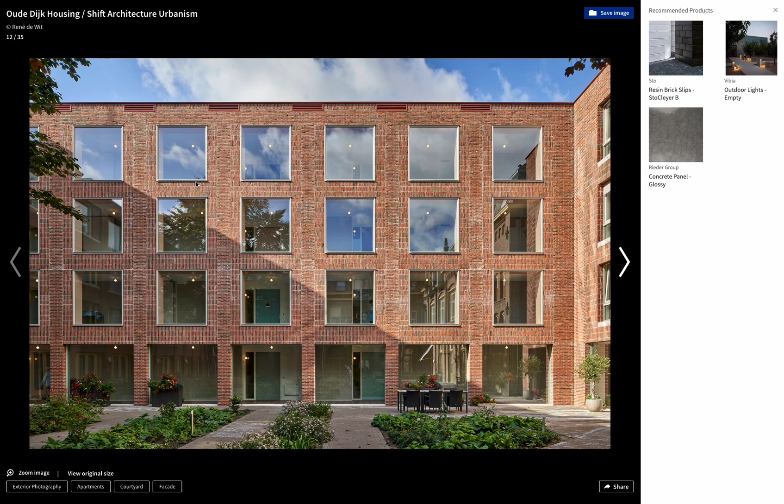Hello, in this video I'm going to use Giraffe to model up this building and use it as a template, so that when you start a new project in Giraffe, this building becomes available as one of the pre-baked templates.

There's a lot of reasons to love this building, in my opinion. It's very simple, very sedate, but with this rich materiality and carefully considered proportion and rhythm, it looks like a really lovely urban citizen. It looks like it's going to be a building that'll last for a long time and add a lot of value. It's called Oude Dijk, I think, Oude Dijk Housing, and it's almost certainly in Holland.

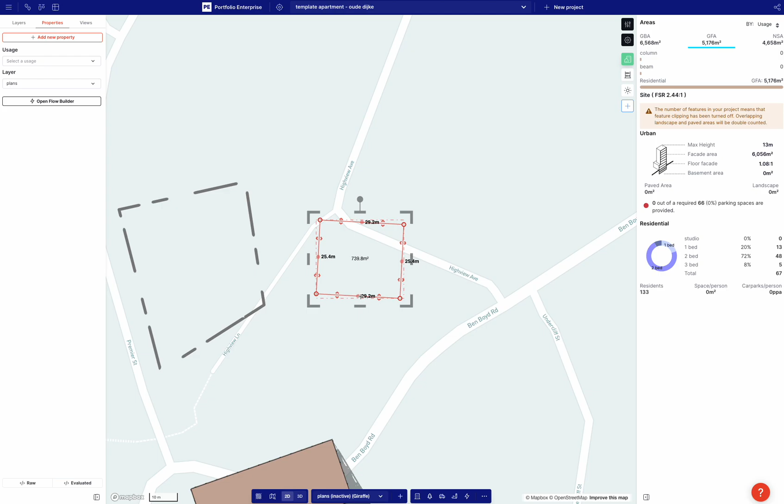I'm going to model this not as an apartment layout, so we're not going to consider the internal layout of this. We're just going to consider the facade, and we'll go through the pluses and minuses of that when we are done.

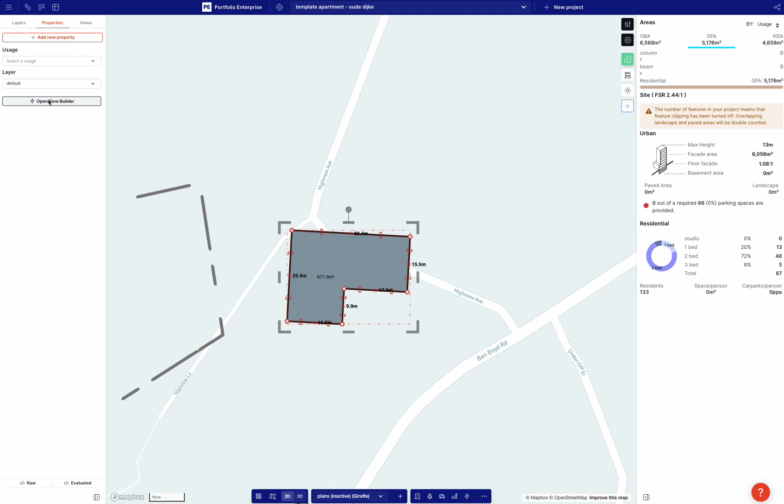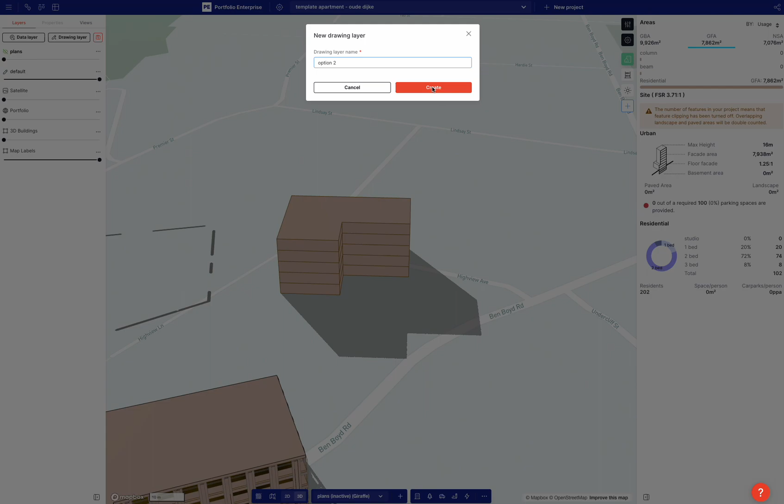So I'm going to assign the usage residential to this building, and I'm just going to make an option to create, just to get rid of this one, which was my practice one. Option 2, buy, and lock. Okay, so it's 4 levels.

You can see this horizontal brickwork goes up, and then there's this kind of vertical infill. So this column here kind of gets a bit skinny. So that distance there and that distance there are different.

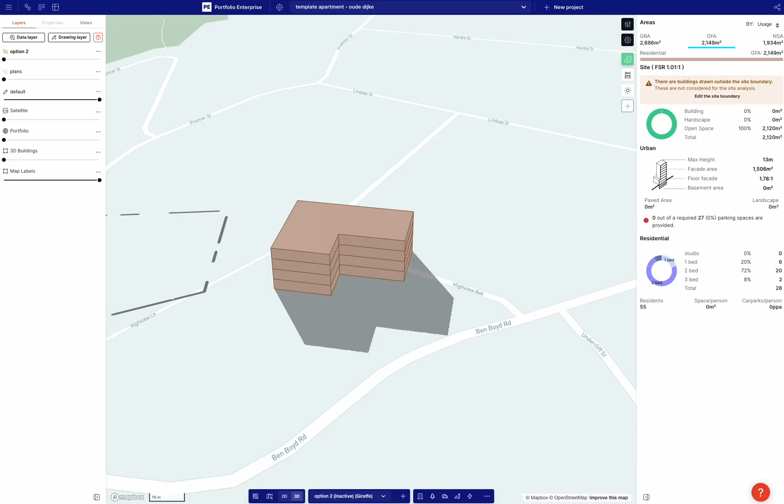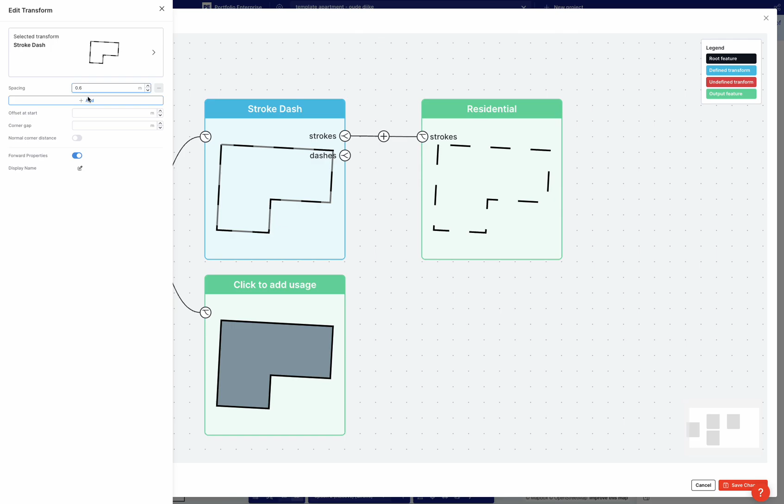Right, so what we're going to do is we're going to use stroke dash. We're going to get straight into the flow builder. So the stroke dash, let's build the initial bay. I think maybe it's about 0.6 by 3.2.

And I'm going to take this and offset this polygon out 0.2, and I'm just going to offset it to the left. And then I'm just going to apply a residential use, just to see what this looks like.

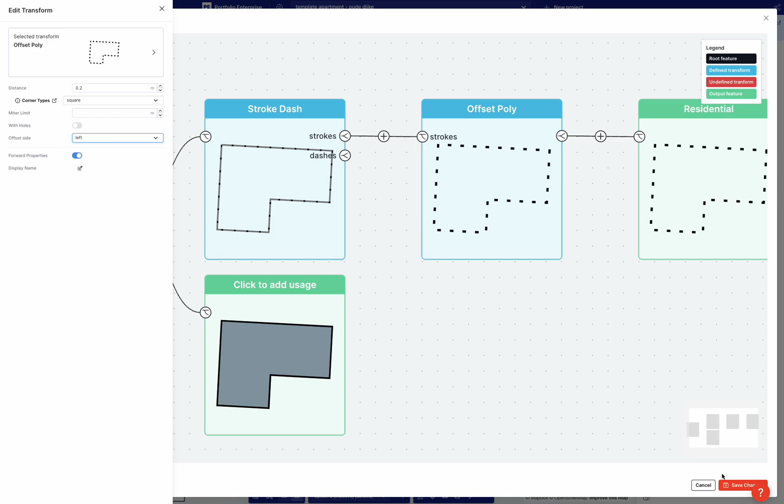Okay, that looks good. You can see that's roughly the right proportion, just a bit more than square. If we come here, you can see that's sort of slightly more than square. We don't want this use to be residential.

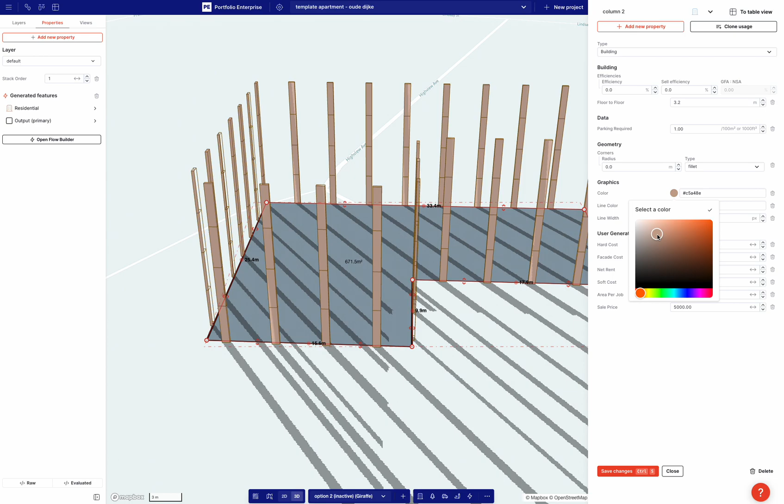So what I'm going to do, I've actually done this already, so let me do it again. I'm going to build a column usage, column 2. The critical thing is that the floor to floor height of my column 2 is the same as my residential floor height, which is 3.2, a very standard residential floor height. I'm going to create a color for this thing, and hit save.

Okay, I can jump back into this flow builder and use column 2. So I'm going to add a usage, column 2. All right, and if I hit save, okay, there we go. That blue outline and that dark brown usage.

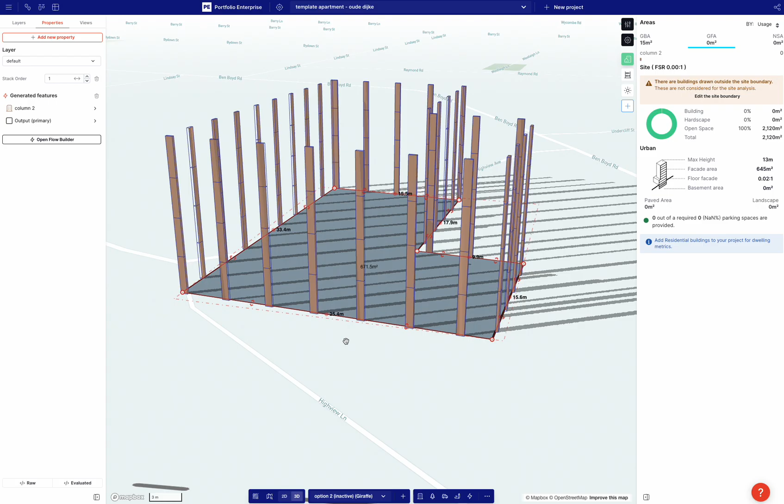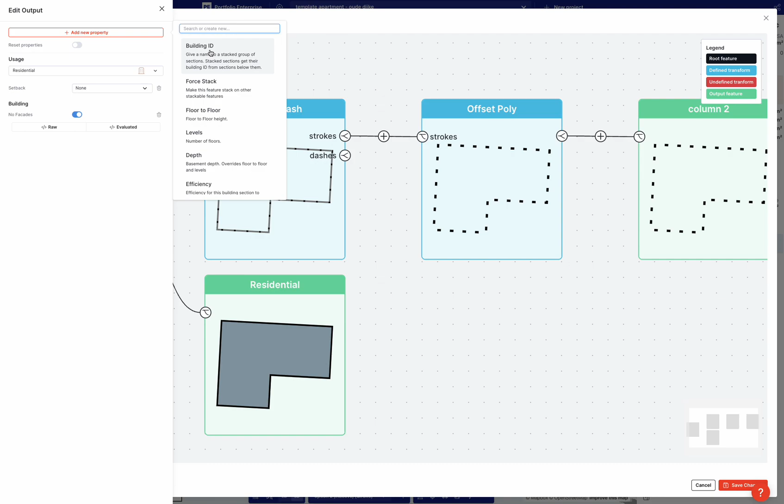Which looks pretty good. What we should do here is turn this into residential, and what I'm going to do is add that no facades property, no facades, and hit save.

And I'm just going to add levels to the main flow. Make sure there's 4 levels. 1, 2, 3, 4.

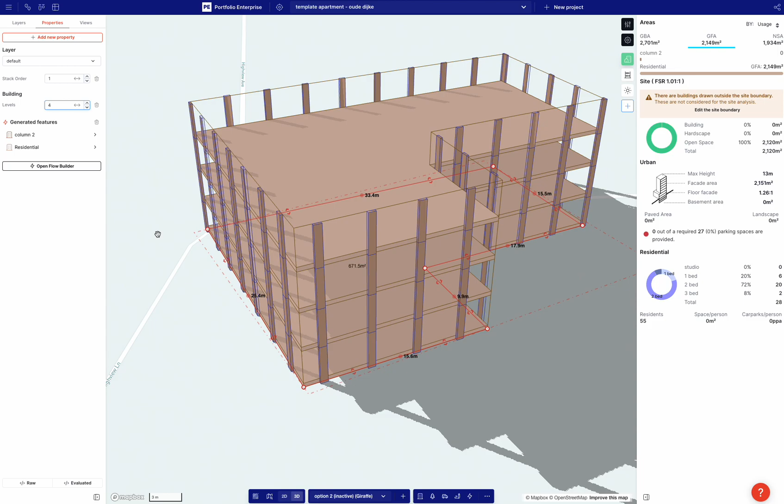Okay, and that column 2, delete those levels. And when I delete the levels on the output, it inherits the levels from the input, and so now everything goes up and down together. You can sort of see we've made pretty good progress.

We may say that 3.2 is slightly too big. We could just sort of start playing with this stroke dash and maybe get it down to 2.9. Now, when I use the up and down arrow, it goes down by a whole unit. When I hold the command or the alt key, it goes down by 0.1.

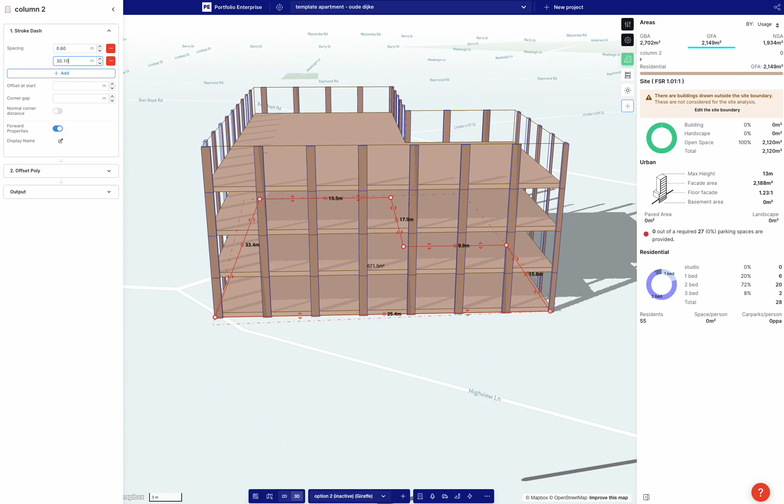If I hold the shift key, it goes down or up by 10. So I wanted about 3.0.

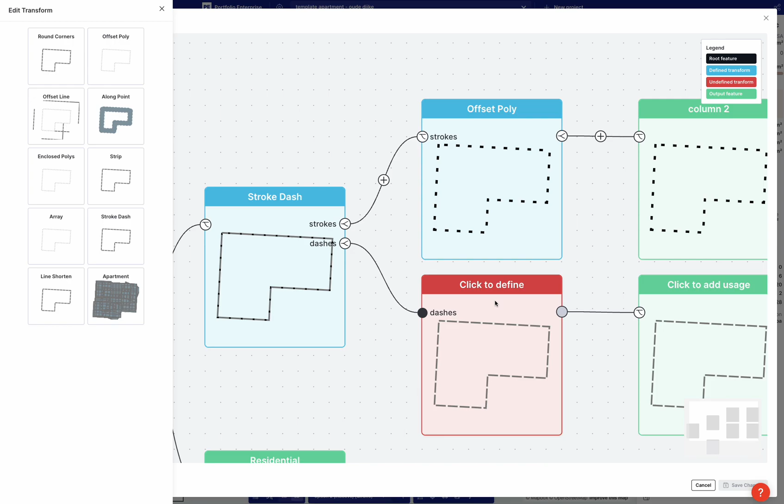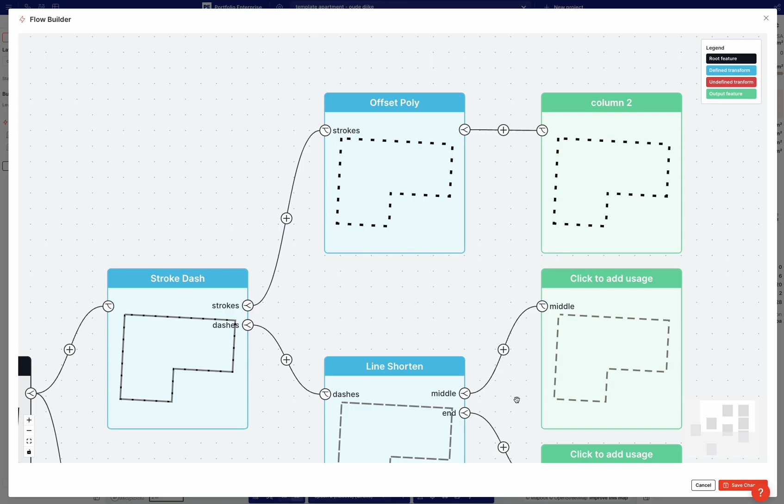Now we need to add some beams across the top, and then add some side column infills. Let's do the side column infills first. We're going to grab the dashes and shorten them, line shorten them by 0.4 at the start and 0.4 at the end. Then I'll grab the 2 end pieces and offset those, 0.2 to the left.

So what we're going to do is delete the levels, and I'm going to get into the flow builder, these ones over here. What I'm going to do is add a base height property, and that base height is going to be 3.2, so it starts 3.2 above the ground, which is one level.

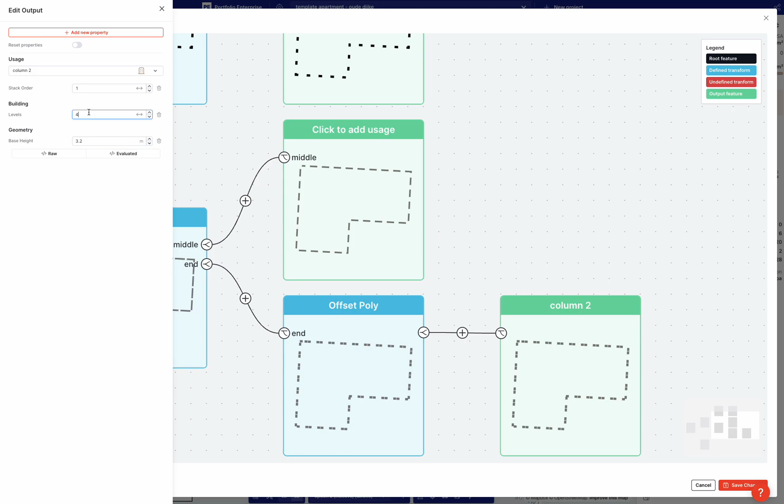And then I'm actually going to add another property, which is my levels. In this instance, I am going to hard code that levels to 3, because the building is 4, and I've started 1 level up, so I only need 3. If I save changes, happy days - you can see now my columns are widening out after level 1 over here.

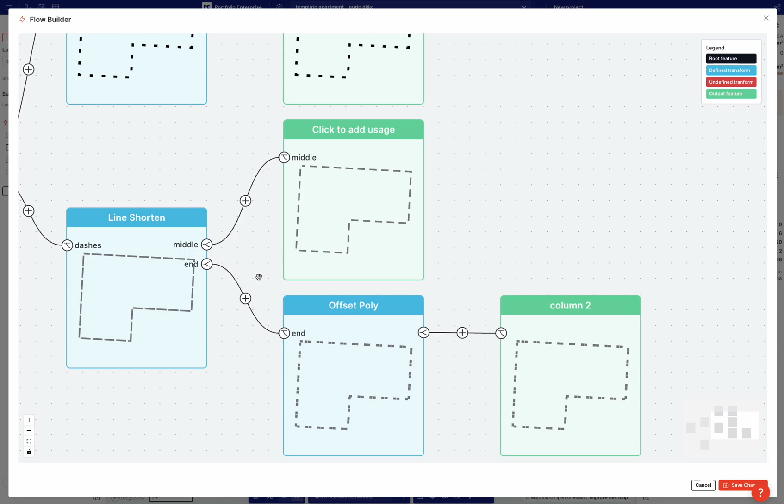All right, so now we just need these beams, and then Bob is your uncle. Luckily we've got the beams over here already, which is these middle sections. So what we can do is offset them as well, offset these polys by 0.2 to the left, which is our standard dude.

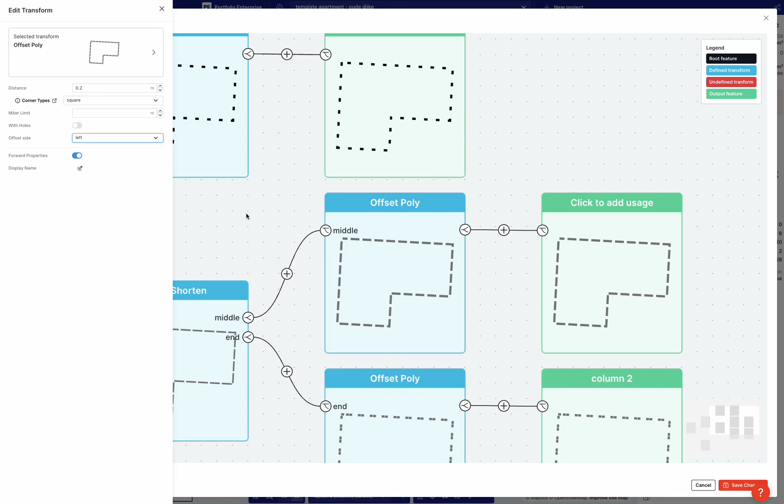And we're going to add this usage. We can add - it actually doesn't matter - well, let me make beam 2 just for completeness. So let me grab column 2, clone it, and call it beam 2. All right, and it's exactly the same.

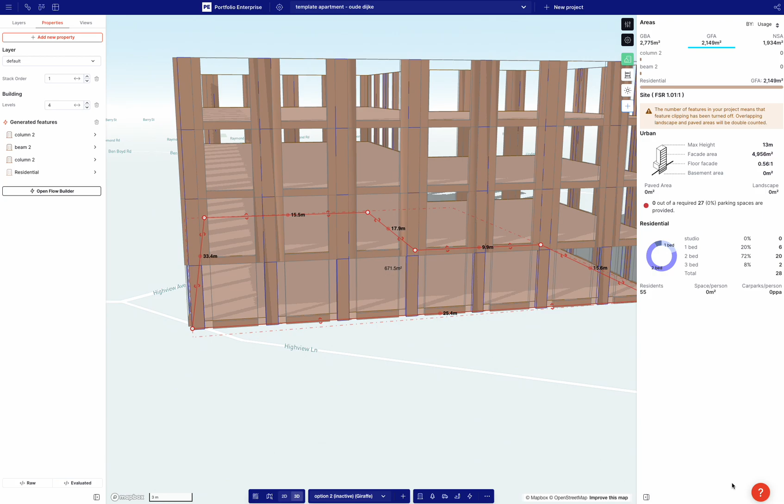The only thing I'm going to do is add a no facades property and set that to true. I'm going to save those changes and hop back into the flow builder, and here I'm going to use beam 2, and just save changes. Okay, and you can see there it is, beam 2.

Now, a current limitation with Giraffe, which we're working on, is the ability to parameterize the depth of these beams. Currently they are defaulted to, I think, 200. That's all you can do.

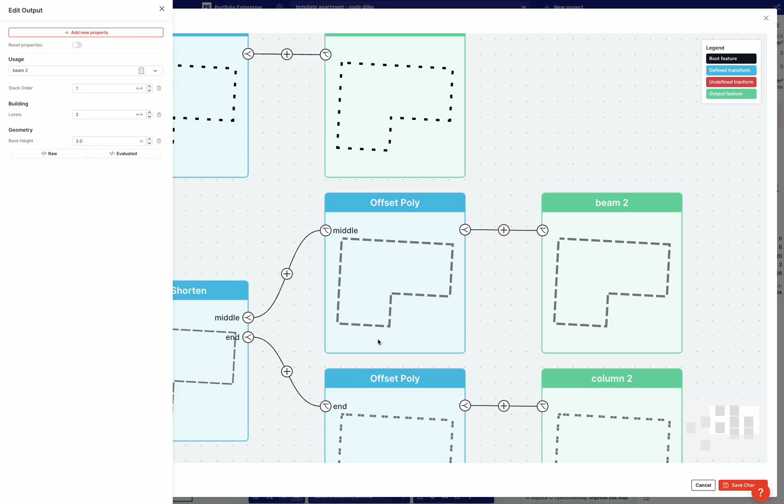So what we're going to do is add a new property called base height, and we're going to do the same trick that we did with that one column. We're going to set the base height to 3, save those changes - right, which is not quite what we want.

What we want is, I'm using the depth of the residential plate, and then I'm going to add the depth of this beam so that they look right, so I get this nice thick chunk here. So it's not going to be accurate, but it's going to be close enough.

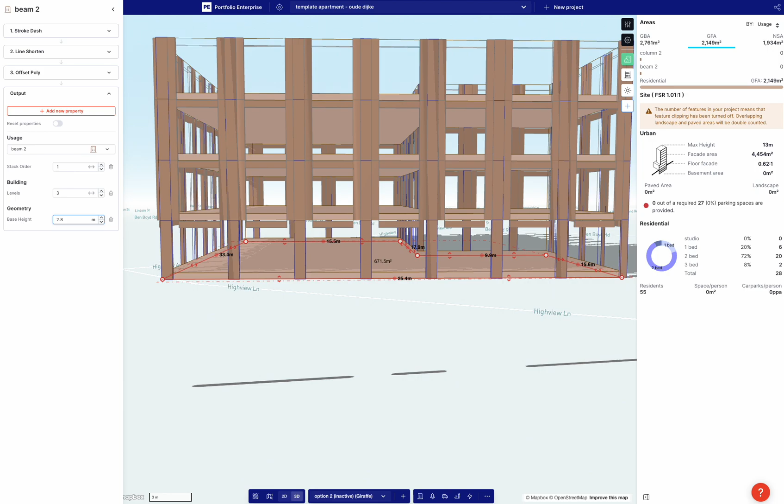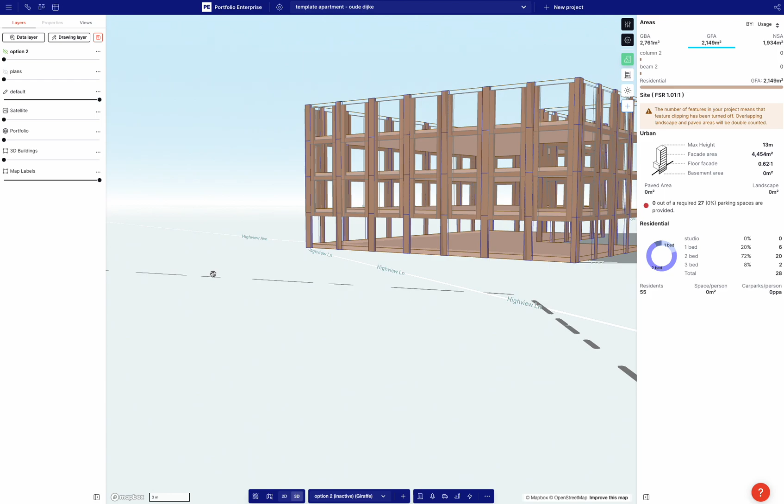All right, so that beam 2, I'm going to lower that to 2.8. And you can see now I want to bring those columns down as well. So I am going to go and grab them, and there they go, down to 2.8. And that actually looks pretty good - I'm pretty pleased with that.

You can see we've got some issues, kind of some battlements at the top, which we need to get rid of. So let's get rid of them.

All right, so what we're going to do now is just chuck a few slabs on the top. So I'm going to set this guy to - I'm just going to leave him as is, I'm just going to add properties. So I'm going to add a base height property, I'm going to add a height property, and I'm going to add a color property.

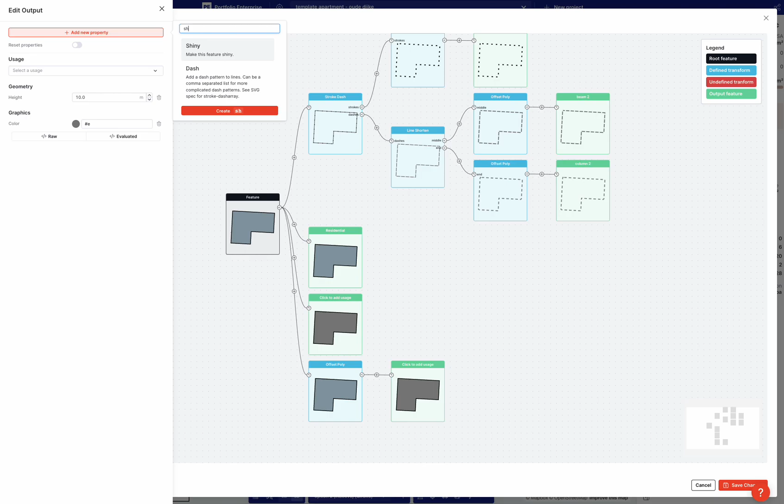I think the base height doesn't actually matter, I'll parameterize this when I'm back in the model. I'm going to offset this poly in minus 0.2, and over here, same thing. I'm going to add a height, a color, and a shiny property, and set that shiny to true. Then I'll hit save, and I should have everything I need.

Okay, and I do, it just doesn't look right. So the first thing I'm going to do is go to my column 2 and grab the color. Just hit Control C and come over here. And that's the wrong one. So I'm going to go to number 1 and change that color to that.

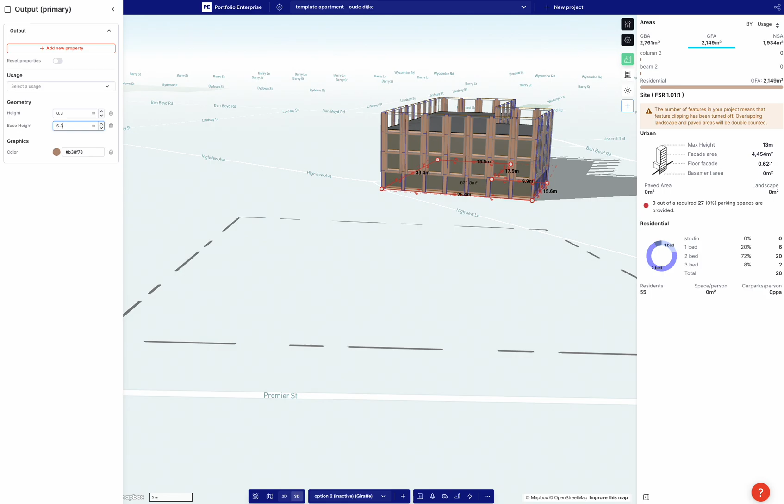Okay, now I'm going to change the height to 0.3, and change the base height to... sorry, I've really gone and messed that up. The height is 0.3 and the base height is too high.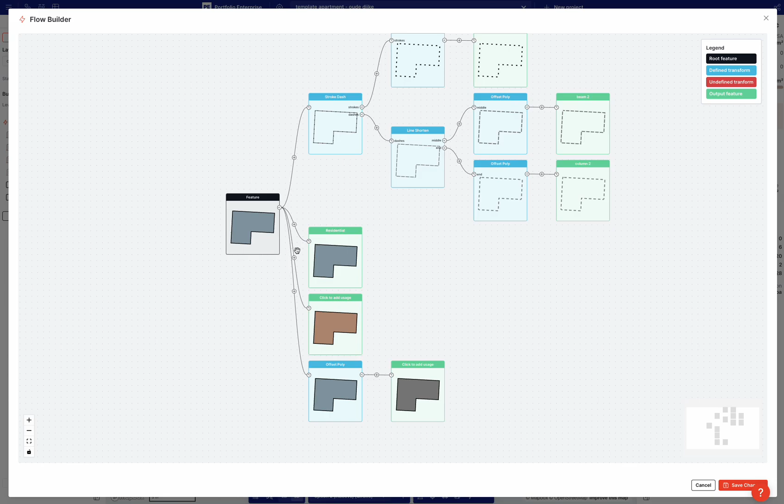I may come back and offset that out. There it is, I'm just going to offset that boy out by 0.2. Save that. Okay, there, so now it's all in line.

It's all in line, so we've got a few issues with the outlines, but at least the lines are good. And now we can get this little guy and set him up to the right height.

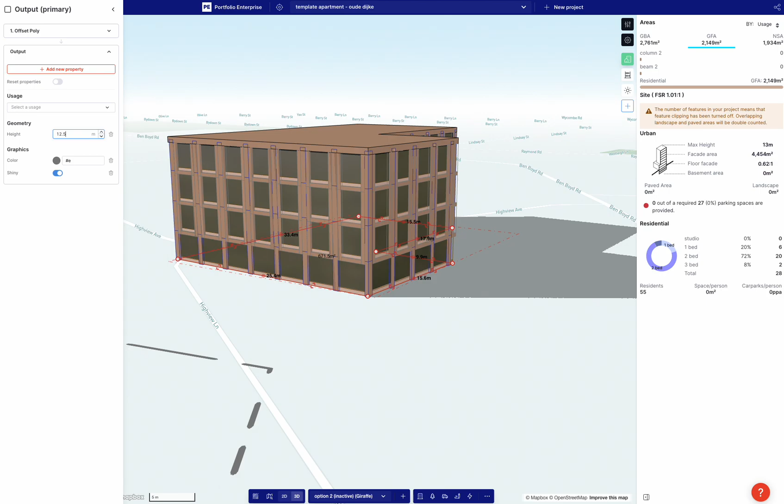Okay, and all this is representing the glass. And the reason he's shiny is because he's shiny. Now this is a challenge: what color do you set that glass? You could say a dark, or you could say a light. I'm gonna go with maybe a bit of a blue.

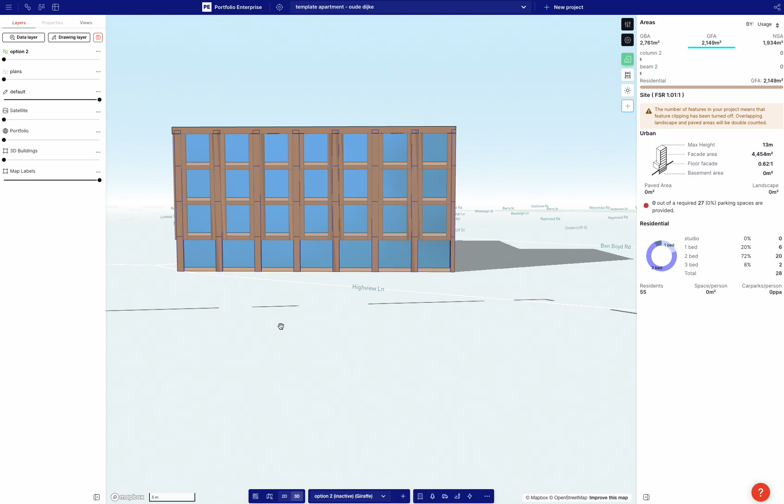See, that looks absolutely awful. So that was a bad choice. And that doesn't look... that almost looks good actually, maybe a slightly darker. This, you can tell my graphic ability is reaching the end.

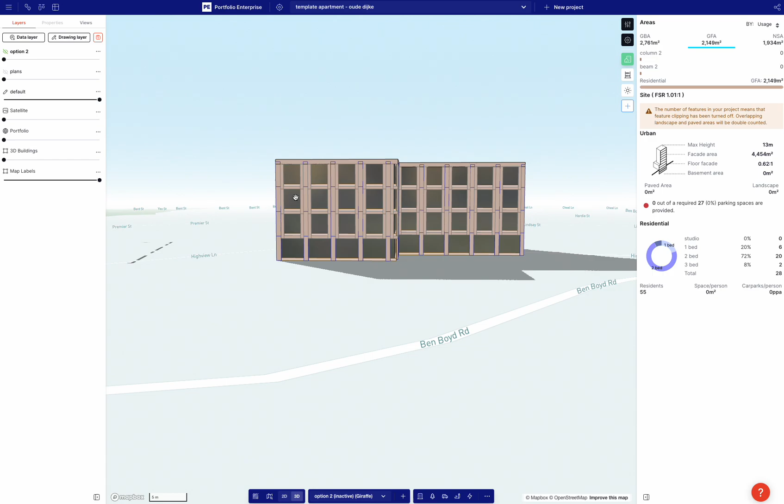Okay, but what I'm going to do now is say I'm happy with that. I think this actually looks quite good. So we've got the proportions, we've got these columns, the big windows at the bottom, we've got these at the top, this sort of narrowing. We've got a few issues with the way we've been forced to model the beams.

Parameters missing from Giraffe, but those will be there in the next couple of releases. And we've got a really nice representation of this building.

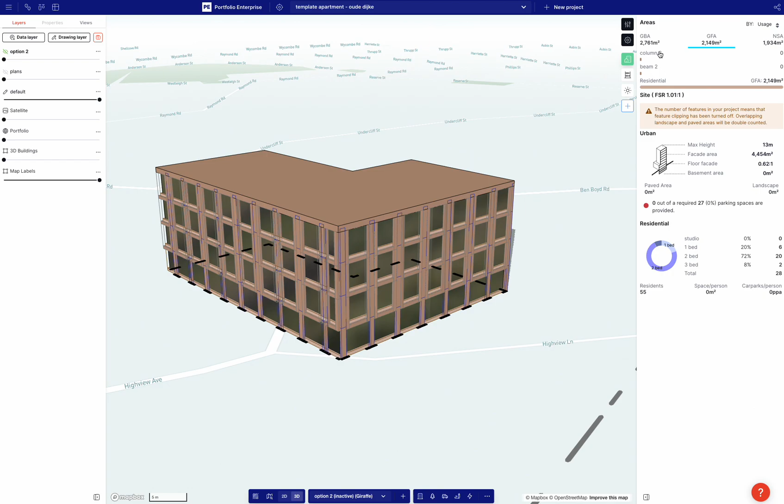And what's great is that we're actually getting the right GFA, because all this other stuff, these beams, this column 2, all of that, and these random 3D masses are irrelevant to our calculations. They're adding 0 area because their efficiencies are set to 0. And so our calculations are going to work.

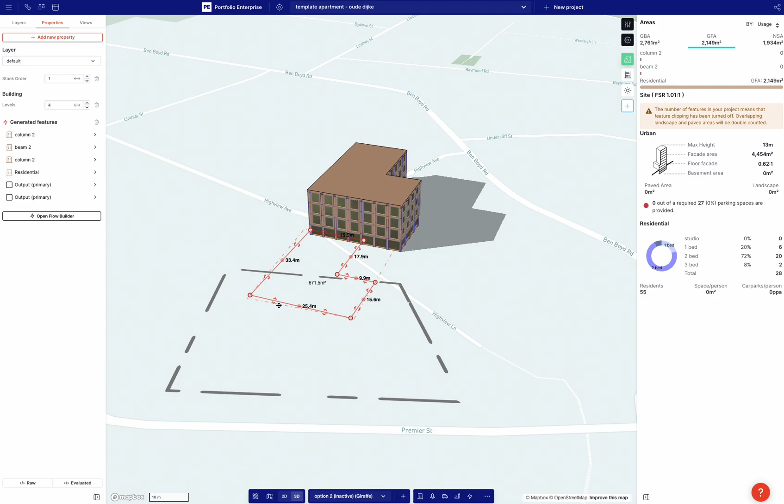And this is where I encourage you to lean into this sort of half model. And what do I mean by half model? So if I turn on the actual plan, which I got from Arch Daily, this is the actual plan.

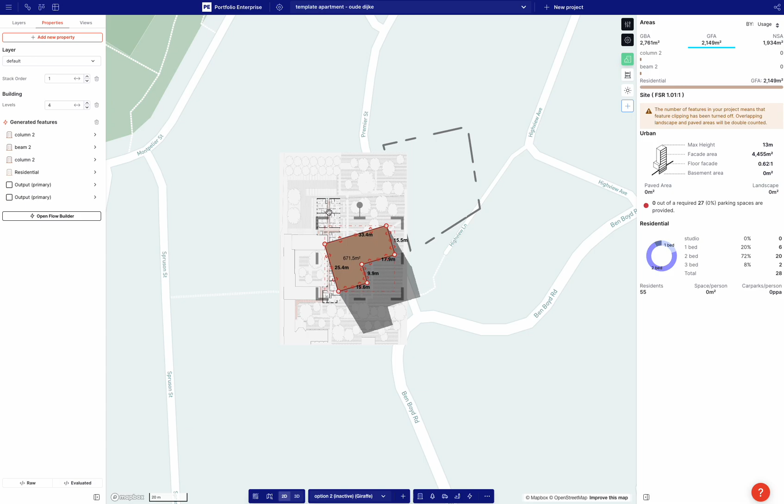You can see the units, there's the corridor going all the way out, but you can see it's moulded onto an existing building. Over here, it's got the courtyard, with the corridor facing the courtyard, and here it's double sided. So what we've just created, this lump of mass, isn't quite right, in the sense that this facade goes all the way around the building.

So let's do this actually properly. Let's scale this to an appropriate dimension. Let's say we're building like 20 meters deep, so about double.

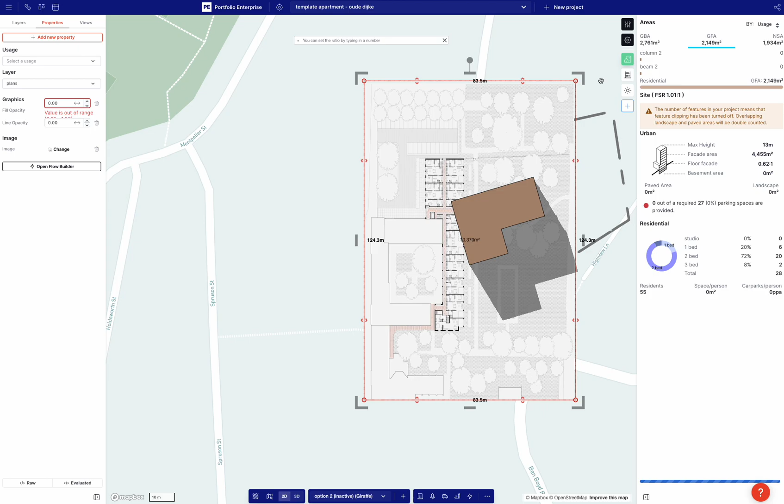Yeah, that's about right. So I'm going to lock those again now, and I'm just going to trace using this thing, tracing over the building.

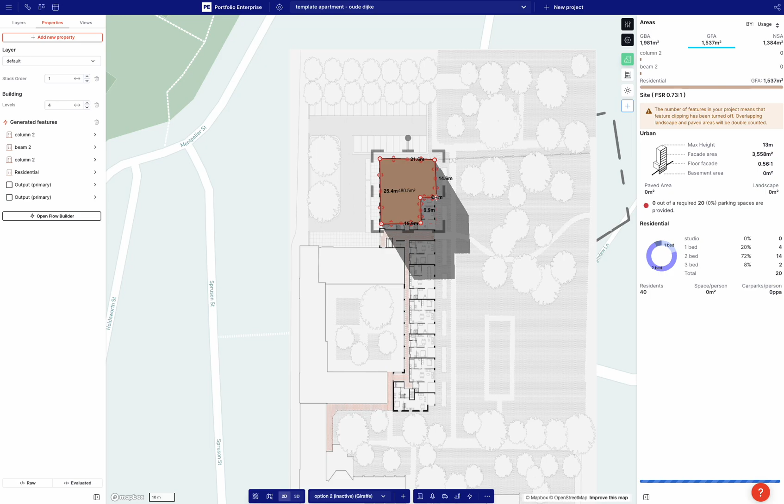You'll kind of see the limitations of what I've done, but my proposition to you is that they're not actually that bad.

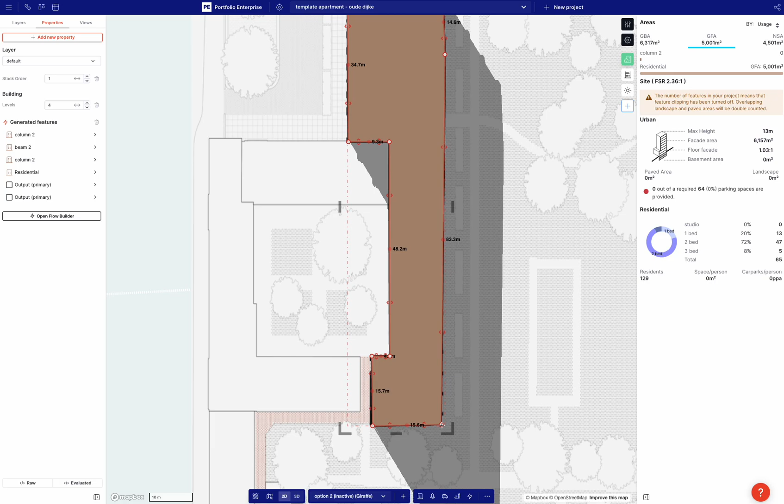Because we're 14 minutes in, and recalling when we actually use this thing, it'll be a template. You'll just be able to access it, but you won't have to go through that whole rigmarole that I've just gone through. Absolute rigmarole. Okay, so there's the building.

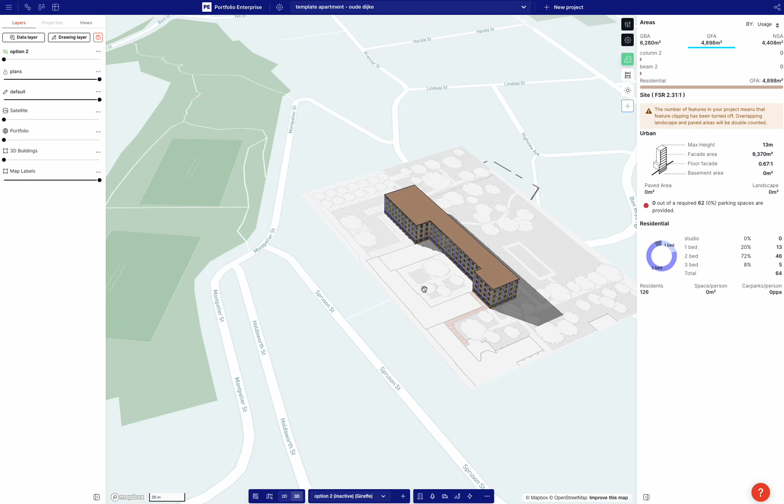Oh man, it actually looks fantastic. Let's just build the existing building. So we do that, and then we do this, and then we do this.

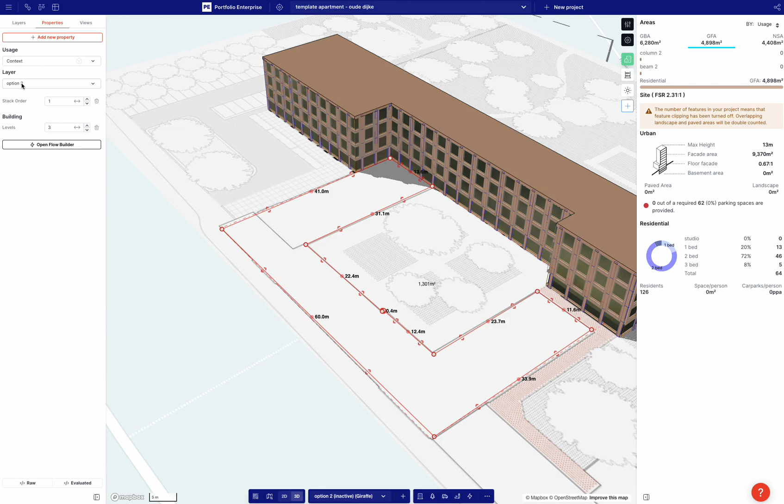Check this guy's context, put them on the default layer. There we go. Just pull them back so there's no stacking issues.

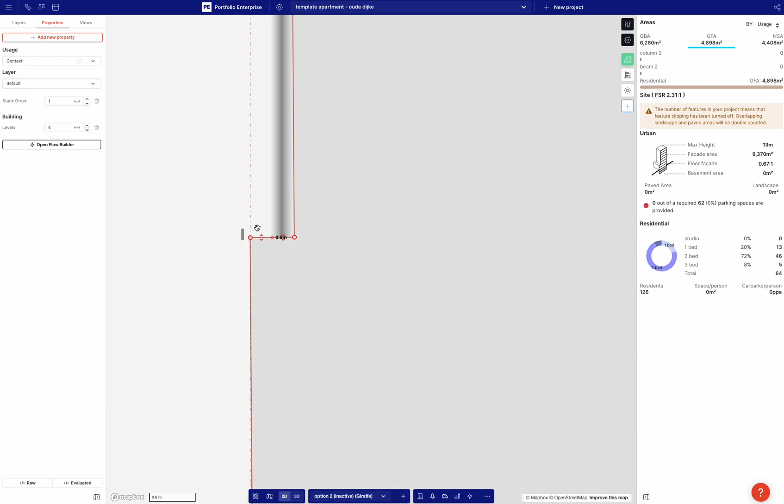And if we were so inclined, we could model out these little kinks that exist in this building over here. But we needn't if we don't feel so inclined.

But it's going to help the proportions. Okay, so I may change the floor to floor in that context. I'm assuming here we're matching our floor to floor to their floor to floor. So let's get it to 3.2.

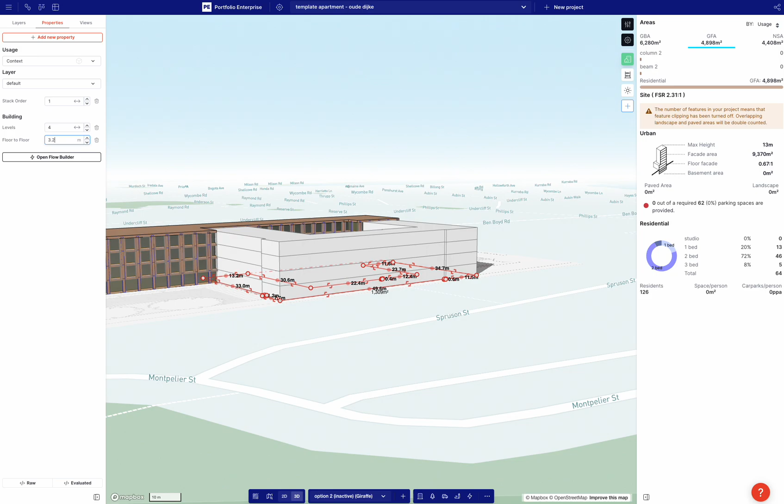Okay, and so now you can see the strength and weakness of this model. The strength is, far out, it looks good. It explains exactly what's going on. The weakness is we're modeling facade to the end cap here, where obviously there's going to be a blank wall.

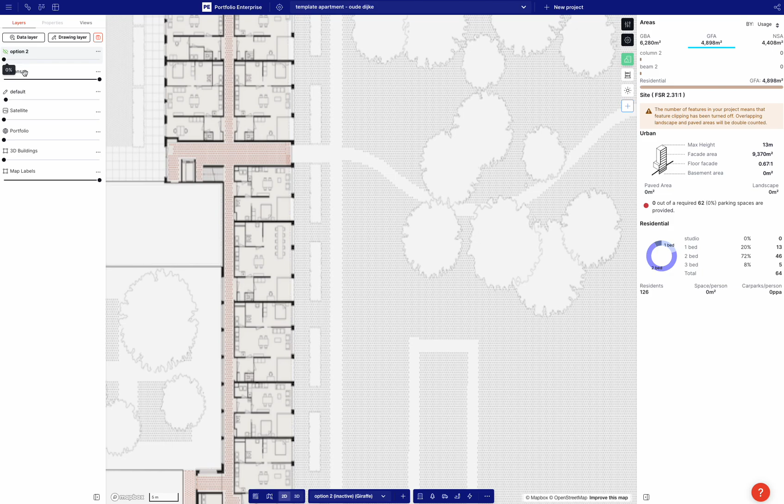If we turn this default down, yeah, you can see there's a blank wall over there. And we're not helping you model this extra large entrance. But very, very quickly, we're in a very, very happy spot, I think.

Let's chuck some trees in. What am I looking for? Trees, that's what I'm looking for. And I've just got to get this default layer and get that active.

I'm going to add a scale property, just scale that guy down. Get the big boys done, and then we'll get the small boys done. The big boy.

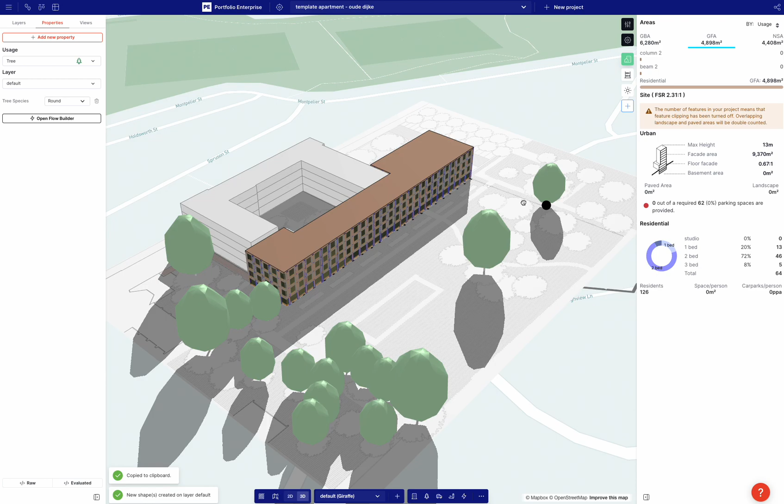I could be getting some nicer trees. One could argue that. But I'm very happy with this.

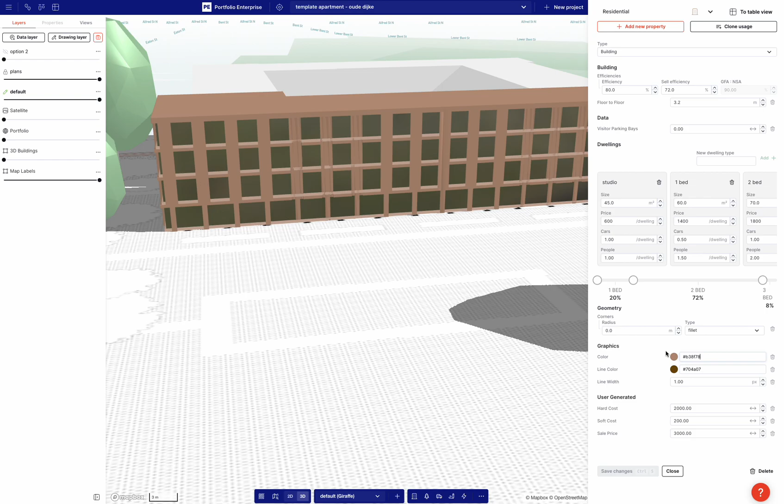If we turn the render off, and let me just update that residential color, so we get the same color as beam 2, and that'll stop this little eyelash thing happening over here. Boom. All right, now we're getting the true, excluding the textures, but we're getting a true picture here.

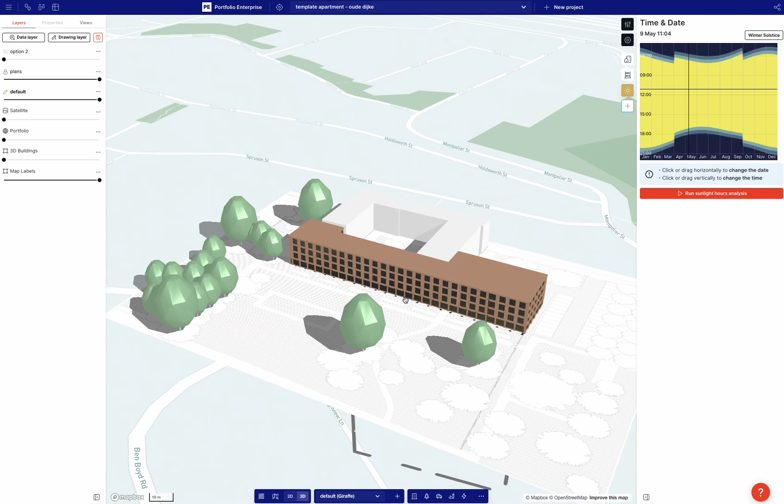And this is going to help communicate a scheme. I mean, this is going to be a really nice scheme to talk about what is going on and why. I think this is a really nice image and explanation. Now, subject to those limitations.

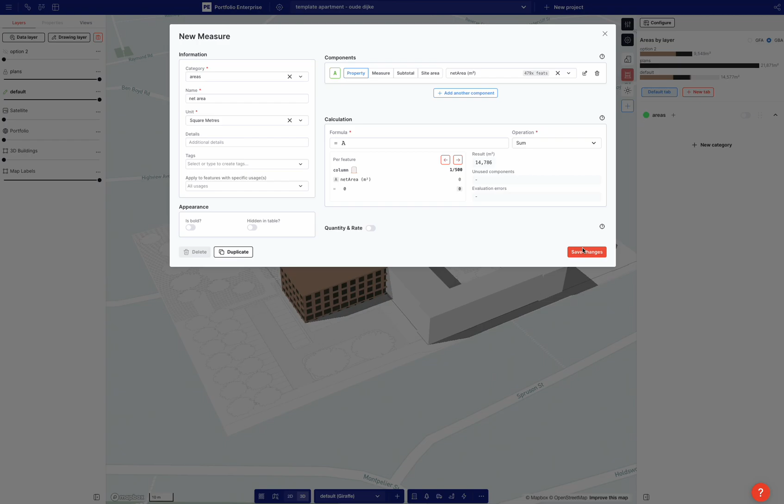And let me just, as a final piece, in the last 2 minutes, that'll take us to 20 minutes, let's just get some areas. We'll add the GFA net area in square meters, and we're just going to look for net area square meters, just return that. You can see this column's returning zeros, and we'll save changes.

Okay, so it's 14,000. So that's 1,500. Does that feel right? Oh sorry, let's just configure this and ignore the plans in option 2. There we go, 9,600. Yeah, so 4 times 1,500 is...

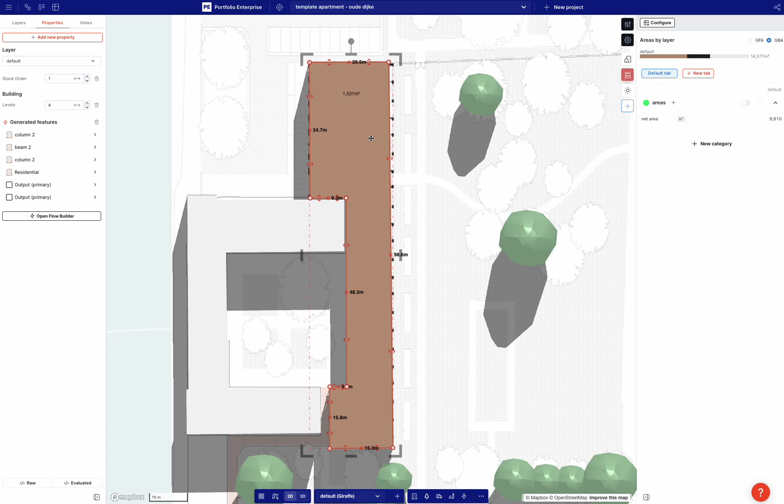6,000. Let me just get this right. Just apply to residential. There we go. So 4 times 1,500 is 6,000. And then 80% of that, which is our efficiency on the residential, is 4,898 or 5,000.

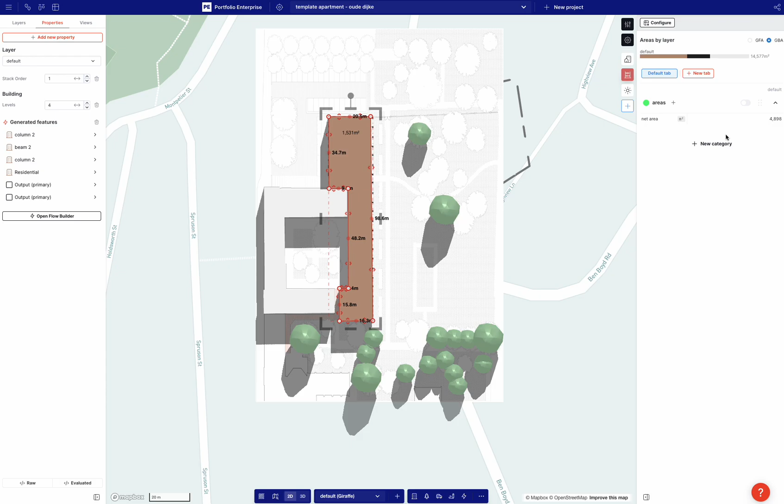Just want to check that context efficiency. Cool.

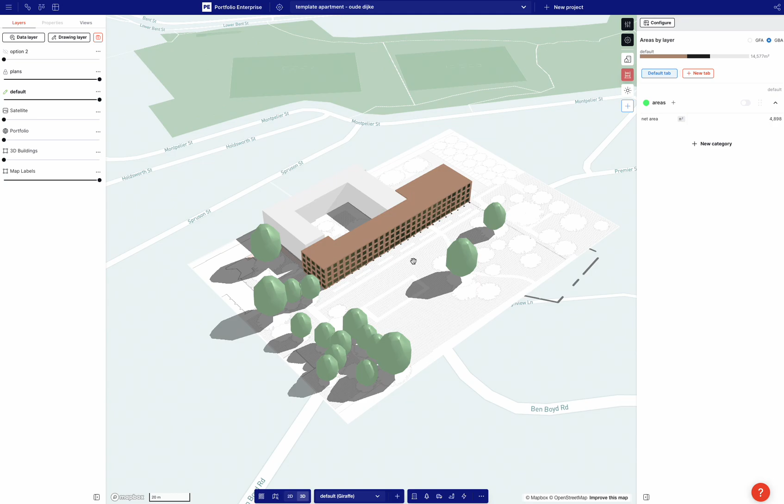We could also get a facade area. So filter down to that residential, we'll look for that perimeter, we'll look for that floor to floor, we'll look for those levels. A times B times C: perimeter times floor to floor times number of levels, 3,178 square meters of facade.

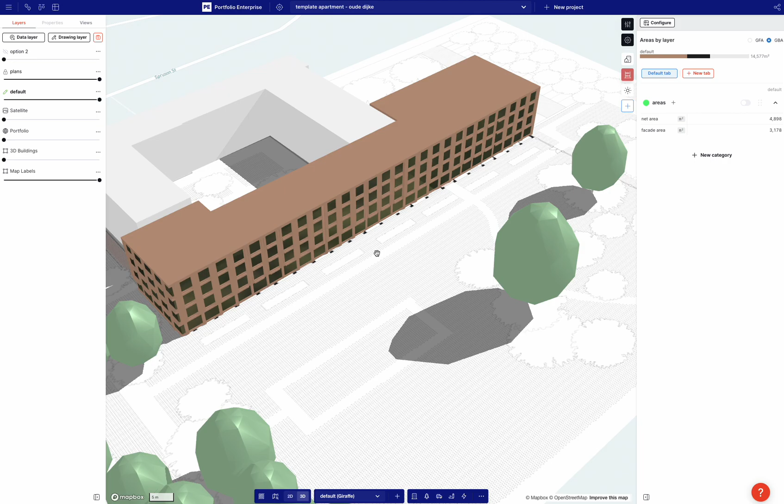And that's now going to be available as a template in Giraffe as a lovely precedent that you can just use. What I'm going to do is I'll save a view.